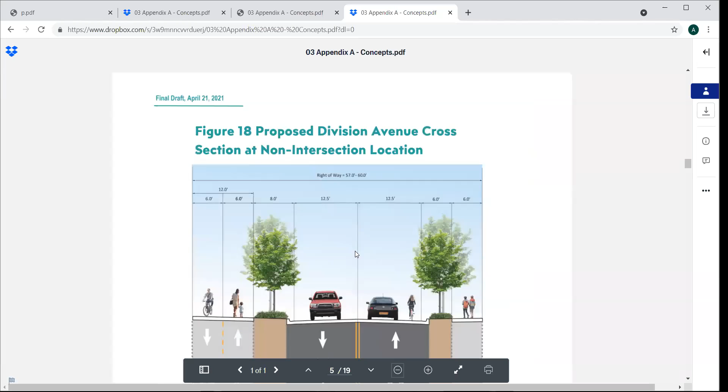Very good. All right, on to the revisions for Division. So Mandy, you said that was the current truck route map. Is there a proposed or future truck route map? Are there any major changes to that?

Quasi—it's later in Appendix A. The reason I say quasi is because we can forecast what we intend for it to be when our capital improvements are implemented. The sequence in which those are implemented and the actual conditions have to be evaluated when we revise our truck route map.

For example, if we completed our Baldy extension project—and that gets completed in, I'll be a dreamer, two years—then in two years we need to come forward and not wait twenty years to update our truck route map, because that's going to really help us make it more accurate.

Further, we've identified in the capital improvement list that we need to do a better job updating our travel models to understand where traffic is, and updating our classifications of streets on a much more regular basis, so we're responding to this growth thoughtfully versus relying on a 20-year-old document.

So the reason I say that is, later in the plan, if these things are implemented, here are the arterials, and the arterials are typically our truck routes. It's going to show a better east-west connection on Pine so we could drop Fourth and Church—that would be great. It's also going to show that we'd have the Baldy connection.

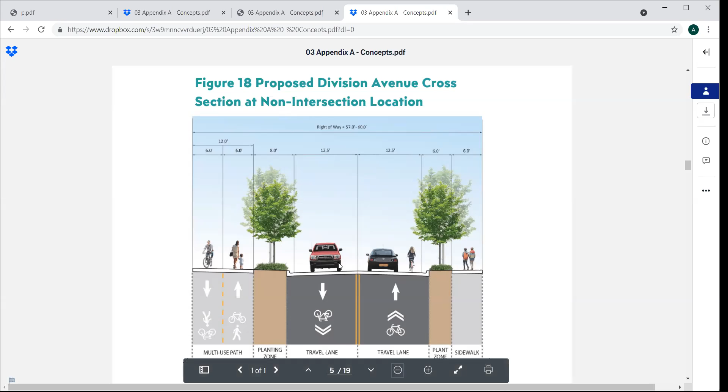With a slightly modified, same consistent path and sidewalk, but slightly smaller buffer zones at the intersections.

I'm going to breeze through Baldy because I think you're familiar with it, but essentially we've talked about in the past with the developments that have come forward, the need, regardless of the Baldy extension, for a signal here at Baldy and North Boyer. The volume of traffic at that intersection is saying this isn't very good. And I know for those of you that have experienced it, it's not only that you wait a really long time, but waiting a really long time means you start to avoid that route.

It means your Google's now sending you somewhere else, which is now putting you on a local road that's negatively impacting our pedestrians and bicycles. So it's this fine balance - we do need to have functioning intersections because the consequences of not trickle down to our other streets where we really want to focus on pedestrians and bicycles.

So then it carries forward, it extends Baldy Mountain to the east and connects into Fifth Avenue or Highway 2.

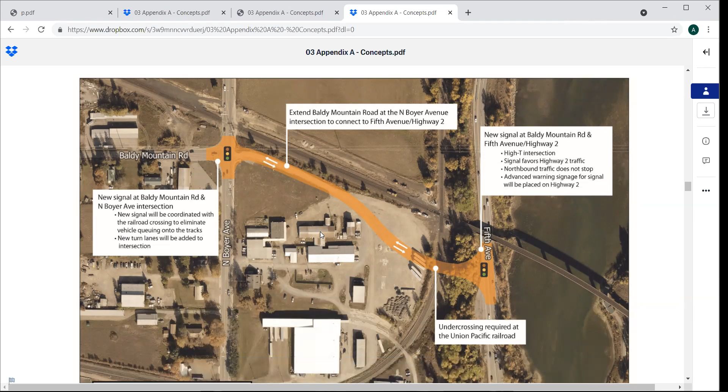This would be Highway 2 where it would connect, just south of the BNSF bridge that crosses the highway. And then it actually goes underneath, in this concept, the Union Pacific Railroad. One advantage is that the city actually owns this property, so from a right-of-way acquisition perspective, it's advantageous.

Did you say we go under the railroad? Yes. Really? Yes, it has its own bridge - they build a new bridge. Is it like a reverse bridge, like a flyover? No, it goes underground. So the current grade, if you were to stand on the ground out there on that property, it goes down, and then it'll go underneath those tracks and tie into Fifth Avenue.

So it's not going to 95, not going to the byway? Not to the byway, good point. So the byway is Highway 95. Fifth Avenue is Highway 2, also it's old 95. Isn't that Highway 2 now? Because 2 comes in from the west and turns into Fifth Avenue - it's technically Highway 95 at 200.

Could, still is. Yeah, it's not two. I thought that was two. Okay, so anyway, there's a transition point. Now this is very exciting, it goes under the railroad track. Yes, because the last I heard, that was kind of off the table, or no, it's been a while. So what you're saying - yep, good point.

So back in previous planning efforts, and here we go with our terminology, the US 200 corridor - previous concepts also provided a tunnel through what is now University Place. So Ebbett Way was extended to the east, and then a tunnel went underneath Burlington Northern, as well as a tunnel underneath Union Pacific. That was a little bit too optimistic. So this plan revised it to say just one tunnel, we're just gonna do this one extension. Does that make sense? Yeah.

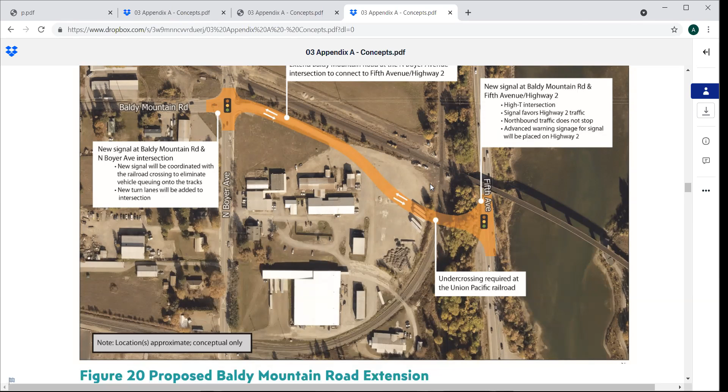We have checked with the grades. The other aspect of this is ITD is planning to lower Fifth Avenue in 2024. They already have plans for that. They're trying to get more vertical clearance underneath that Burlington Northern Bridge. So it kind of works well with our project because we're trying to go under too.

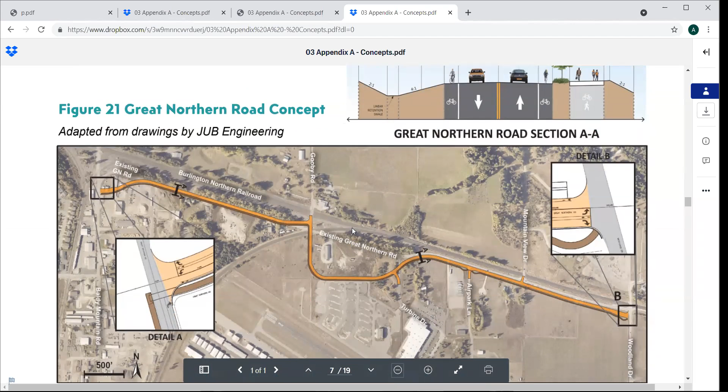So Great Northern Road, we have presented this on a couple occasions, but not here at Planning and Zoning, so I wanted to give you a quick update on that. The Great Northern Road is currently included in our Northern Urban Renewal area and district - Burlington, or I keep saying Burlington Northern, I'm sorry, that's what happens when I talk a lot. The existing Great Northern Road has been included in that plan since 2005. So we have to have a plan if we're going to have a Northern Urban Renewal District.

That plan says specifically we're going to improve Great Northern on the idea that improving it from a stormwater perspective helps spur economic development. That's really the nexus there, because currently Great Northern serves a bit as a dam, if I can call it that, and the stormwater in that area hasn't been well thought out. That is having an impact potentially on adjacent properties being able to develop those industrial lots in the manner they would like. So it's about us working with the adjacent property owners as well as this road to find relief for that stormwater.

So that was really the primary goal behind the Great Northern Project. Obviously, the road is failing as well, and it's not safe from a multi-use or pedestrian route perspective as we continue to get more residential development to the north. So the project is a full reconstruction of Great Northern - full width, stormwater, everything included.

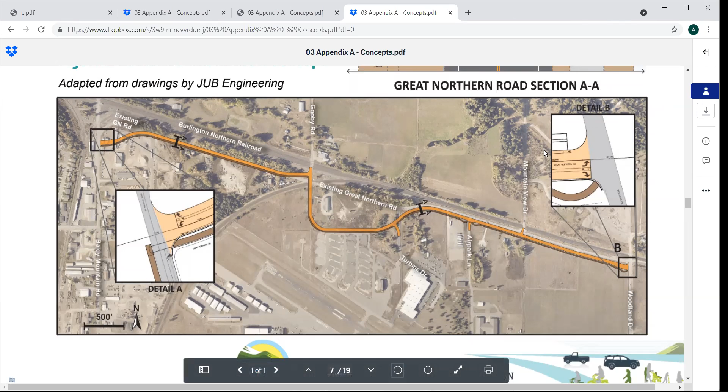This will continue to be refined in the design. But what I wanted to show you was this section, because I hope this addresses your question about making Great Northern safer.

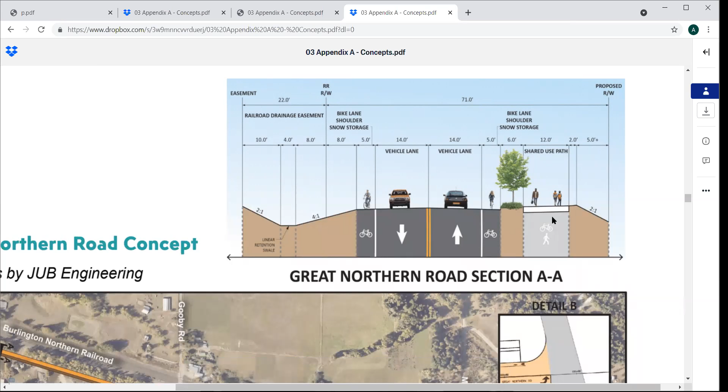Yes, we have a 12-foot path. We also have the bike lanes, and the reason for both is because we know we have commuter bicyclists that just want to be in the road, put their head down and go forward. But we still have pedestrians and little kids that want to ride their bike and feel safer, or adults on a multi-use path.

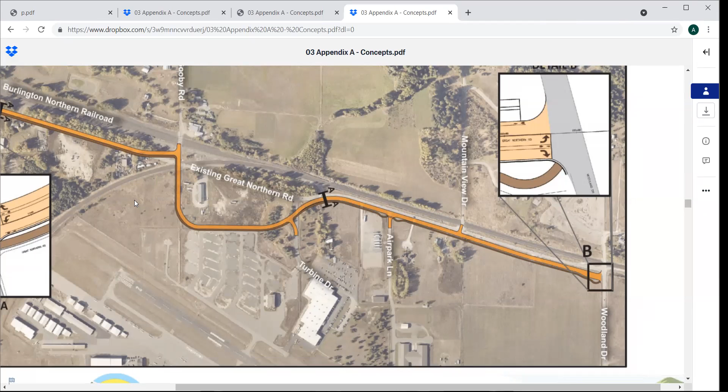What do you think is a realistic time frame for this project? Great question. So we already have a fair bit of funding allocated for Great Northern.

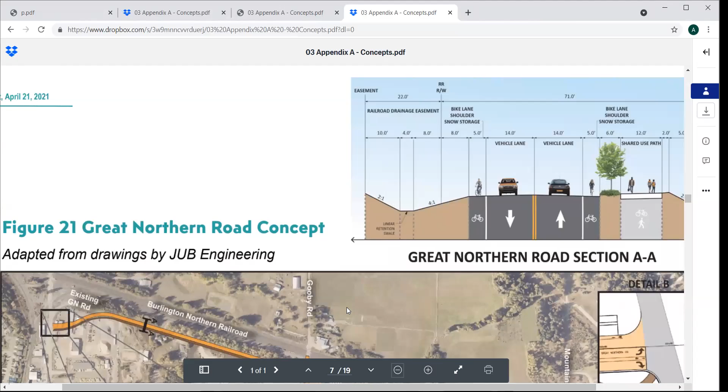In our capital improvement list, we've phased it. So in the next 0 to 5 years, we are going to complete not only the preliminary design, which we're already doing—most of these are just concepts, then the next phase is preliminary design—the engineering is already underway right now for this project, because it's already included in an adopted urban renewal plan. So with that, we need to do right-of-way acquisition, and we need to clean up right-of-way.

So that probably will take us a little bit of time. It's a complicated mess, for lack of a better way of putting it. And once we can get through that, where we don't have complicated right-of-way acquisition, we can start coming up with phased construction packages.

So that's part of the current contract with our consultant designing this solution, is to propose a phasing plan for this. I anticipate we'll spend a fair bit on our construction investment. I would say in the plan, we're saying around $8 million by 2029 is when we sunset with that. We need to spend it.

I do, and it's reflected in the plan. The overall project is a larger dollar value than that. So it will be phased, and we'll continue to look for funding opportunities to hopefully get that project completed in a timely manner.

This personally just seems like such an important project, considering how much new housing is going in North Sandpoint, just to connect that to the rest of our community. I 100% agree.

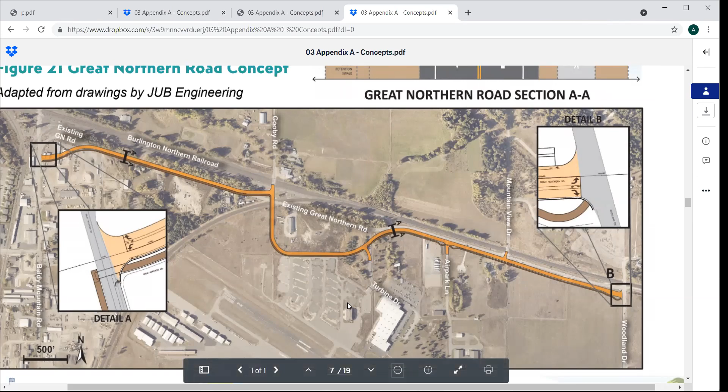So Pine Street, this is trying to show our short-term east-west connection. In a nutshell, we currently have a lot of cut-through traffic through South Sandpoint. I know all of you are familiar with that. Really, this goes back to the statement I made earlier—it's because we're not providing them an adequate alternative route. So they're getting bound up and not wanting to take this right turn onto 5th Avenue and then a left onto Church and hope you can get out on Church. And so they're finding the path of least resistance, kind of like water, and going through South Sandpoint.

So this proposal is saying we're going to close off access westbound from Superior. You'll no longer be able to go straight through South Sandpoint. We'll do that with signage in the short term, and push traffic north on 1st Avenue on Pine, recognizing that the community would very much like to see Pine Street taken back to a two-way in that single block location.

So we have worked really, really diligently with ITD and done an extensive amount of modeling to support the fact that we can make this change without negatively impacting their system, which is an important aspect. When we're talking about including changes in our plan on another jurisdiction's road, it's really important that they're on board with the solution. We could put a solution in our plan that they're not on board with, and then we'd be fighting uphill the whole time. So we've done our best to partner with them on these solutions.

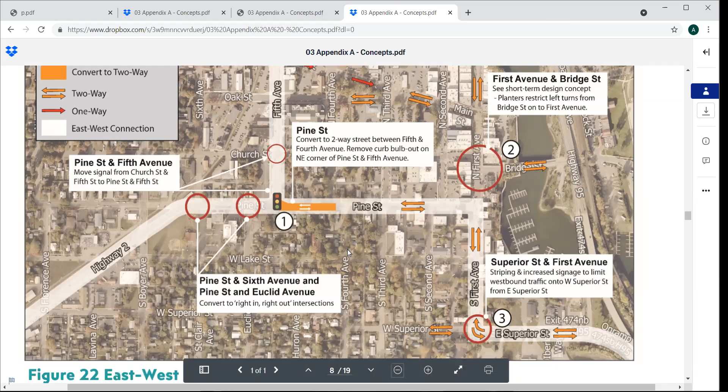It's not like they're cutting through, they're following directions, because it's the path of least resistance - our arterial systems are currently not functioning the best that they can. Well, a lot of people living in South Sandpoint do that. I used to live on Euclid. It's just a really common way to go through that part of town. But yeah, it's residential - it's just too much volume.

In fact, I'll confess our engineers asked, is this really a problem or is this a perceived problem - because that's a valid question at times, right? So we did a lot of data collection and they were blown away. They're like, yeah, this is a real problem. We stood out in the intersection with 3 people, not machines, people, and literally just counted.

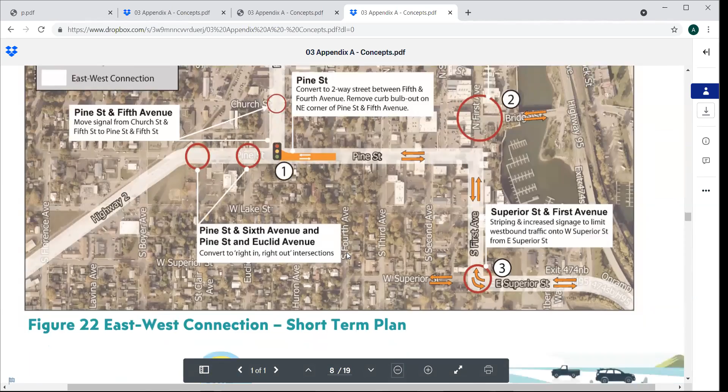And it's remarkable, I think the stoplight pole is still there at the end of it. I don't know if it meets current standards, but yes, it is still there.

Okay, so long-term this solution is showing - fast forward to the future. I don't know if the future is 10 years, 20 years, at which point all of these things may be implemented. But we anticipate, as a result of sheer volumes of traffic, that we're gonna find a need to add signals at these locations. We're gonna talk briefly about some changes at Bridge and First, and then we do anticipate needing to move forward with the couplet - not the curve, but the couplet.

Basically a couplet is sending northbound traffic on Fifth Avenue and southbound traffic in what is currently the parking lots. Those parking lots are owned by ITD right now, and that is their right of way to put the highway.

What this plan has revised, and I think arguably improved, is we're no longer putting in a road and wiping out several businesses. Really the objective with this was to make the data work for sure, make it safe absolutely, but do everything we can to avoid wiping out businesses. And so in this application, it's one business that would be taken out, and that's Melody Muffler. I have spoken with him myself, and he's incredibly excited about this project. It was the easiest conversation I've ever had with anybody, so I really commend him for his understanding.

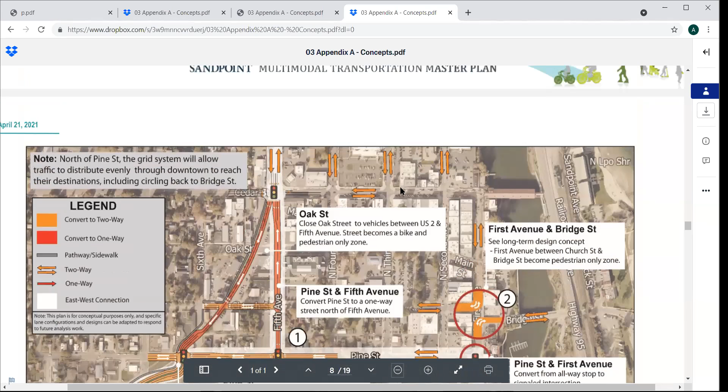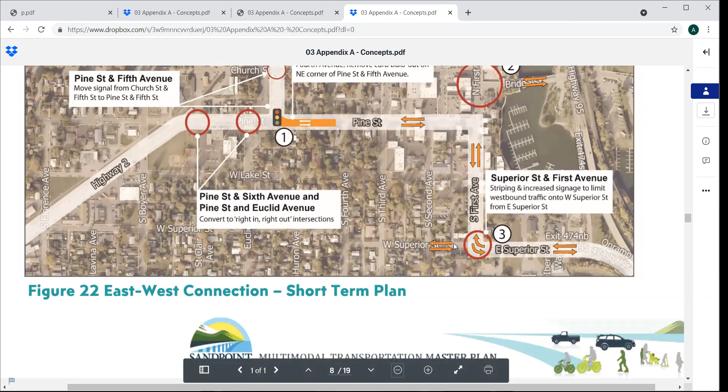Were we right the first time and we should have acted on it? Why are we coming back to this now? Great question. We're going back to it for two reasons. I don't think that we were wrong. I think we made decisions based on the data we had at the time. We've now felt those changes, and I think the fact is sometimes there are unintended consequences.

The unintended consequence of making Pine Street one-way for one block resulted in all this cut-through traffic through South Sandpoint. It's like our main line of pipe — we put a hole in it, and now the water's going everywhere else. So because of that, we're saying we've got to repair that pipe, because that's where we want the flow to go. By doing that, we're actually making our local streets safer.

So I don't think the decision was wrong, but as far as the couplet itself goes, I think we were concerned about how many businesses it was impacting, as I understand it. Number one, Dub's was threatened — that was completely wiped out. Yeah, that was on the oval, or the curve. It had a big oval-shaped roundabout in it.

Even the concept of just moving the signal, because of the turn lanes required for the size of that intersection, would wipe out Dub's. So even without a roundabout at that location, keeping the signal there in the long run would take out Dub's. So what we're doing in this application — and that goes back to me saying we think we can do better — is moving that whole signal further onto city-owned property, the park next to the garden, Dub's Field. In the past, ITD has avoided impacting a park like the plague, rightfully so, because most communities don't want that and federal funding doesn't want that.

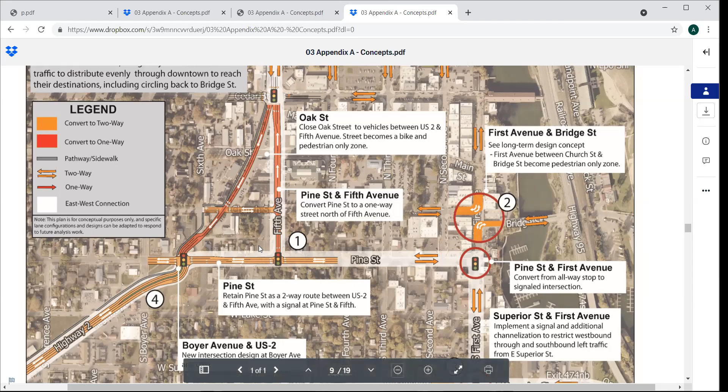Okay, so Bridge and First — this is the short-term concept. Back to level of service, although it's only one metric, I do want to note, because it's a data point that helps give a visual: during our peak season, on a Saturday, we actually counted data. We did pedestrian, bicycle, and vehicle counts for every turn movement, and this intersection functions at an F today without additional growth on a peak season Saturday. It's terrible — terrible for all users.

So this short-term solution is really taking two factors into consideration. We know we have a final phase of our downtown improvements, so how can we improve this final phase, this intersection, with a long-term vision for the future, so that we're not reconstructing what we just built? We don't want to build something in the short term and then in the long term realize we've got to do something with this intersection — now we've got to rebuild First Avenue and Bridge. So we're saying when we go to do the improvements on First Avenue and Bridge Street, this is where we'd like the sidewalks to be, this is the cycle track — we're improving bicycle connectivity with a cycle track itself.

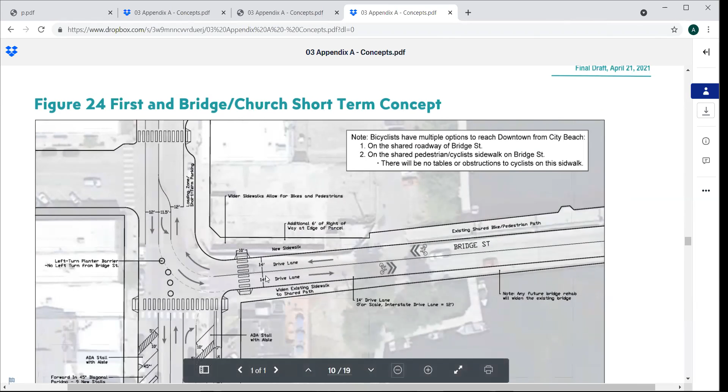So with that, it's a short-term plan. It provides some temporary planters, when we're in peak season, not during snow, to prevent those left turn movements that you're not allowed to do southbound currently. So that's kind of the short-term plan.

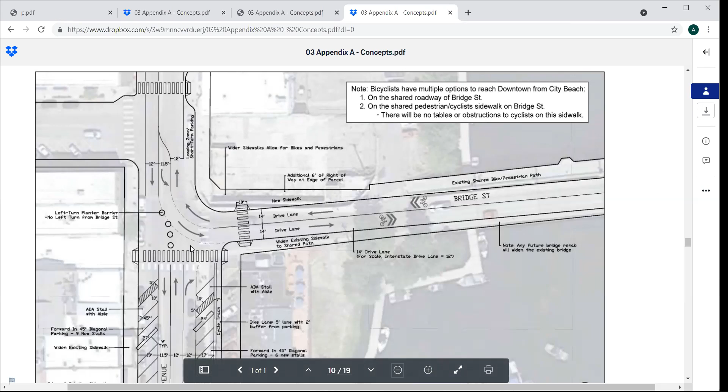But we know we're already at an F, and the sense is that at some point the frustration with this intersection is going to have a tipping point. If and when it does, I don't know when that's going to be—that's really for our community and council to decide, not just the data. It could be a year, two years, 20 years. I don't know, but we're going to get to a point where we're going to say enough's enough at this intersection, we've got to do something.

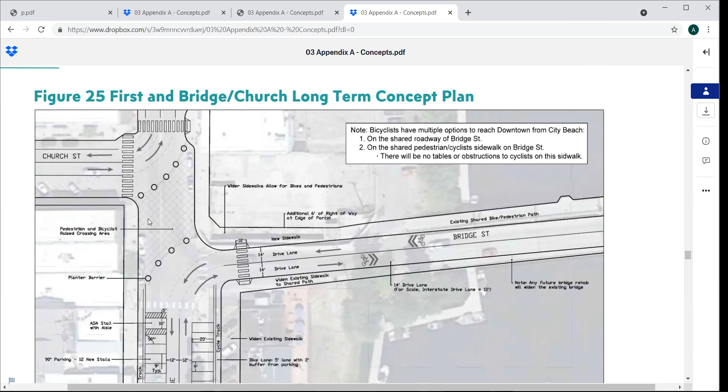And this plan is proposing that something—albeit there's no perfect solution at this location—would be to actually block off movement at this location. So between Church and Bridge it becomes more of a plaza, and we provide free flow this direction. This portion of First Avenue becomes more like a parking lot, with 90-degree parking stalls so you can come in and out.

And this solution, from a pedestrian perspective, a bicyclist perspective, and a motorist perspective—we looked at all metrics and it goes to an A for all users. So from an F to an A.

I've been talking for a really long time, so I apologize, thank you.

So it has a significant improvement on it. It is a big change, and big change takes a little bit of time to maybe warm up to. So I don't think we're ready for this now, but if we get to the point in the future where the community says we've got to do something here, maybe this is what we'll consider.

I don't know, I think they would like it because it's the most contested area. When the whole traffic revision happened, that area—we went back and forth many times on what was the stop sign and no turn. Wouldn't that also remove the need for a light at Pine and First? It doesn't.

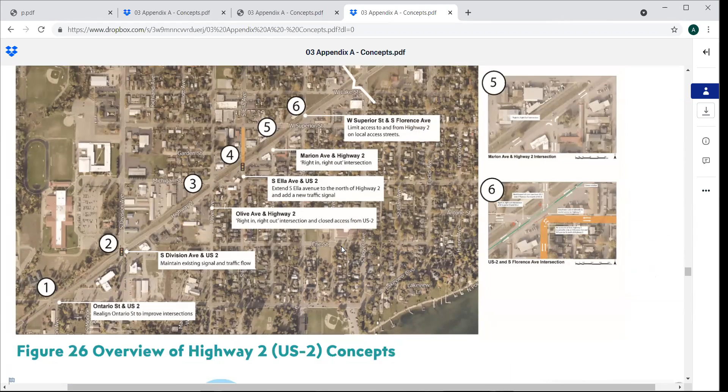That could be an unintended consequence. There's a lot of U-turn traffic at City Beach with people saying 'how did I get it here' - it would take some significant signage. That is 100% right.

Well, in high school we used to cruise the beach all the time. That still doesn't happen. You're dating yourself now. But it's true, if you're coming into town, I got busted by her cruising the beach.

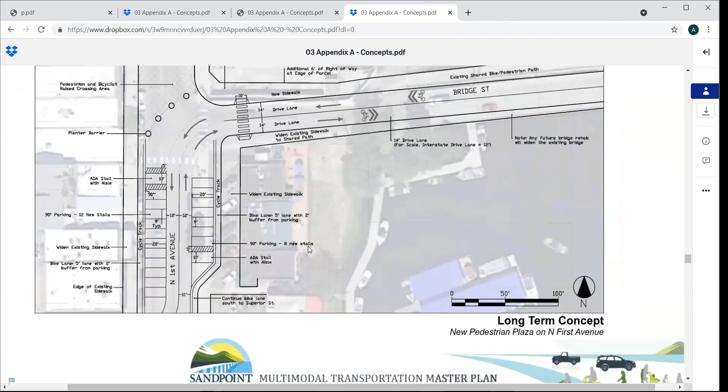And if people take a left on Pine and they wanted to go to the beach, they're gonna be bummed, and they're gonna try to go around the corner, and they're doomed, they'll never get to the beach. Well, they just have to turn right on Second and go to church. But they'll need overnight accommodations there. Get a milkshake and try again.

That is a point, if you're on the north side of town and want to go to the beach, it's a much different route. I think a lot of us look at this as coming into town from the south. But from other directions it kind of makes sense, because I feel like it does a better job of putting people on Pine Street. And that's what we want, we don't want people driving through town that are just trying to get through town. Exactly, and if you just want to come to the beach and go back south, then just stay here. Well, a whole lot of those cars in the summer are gonna have big boats attached to them.

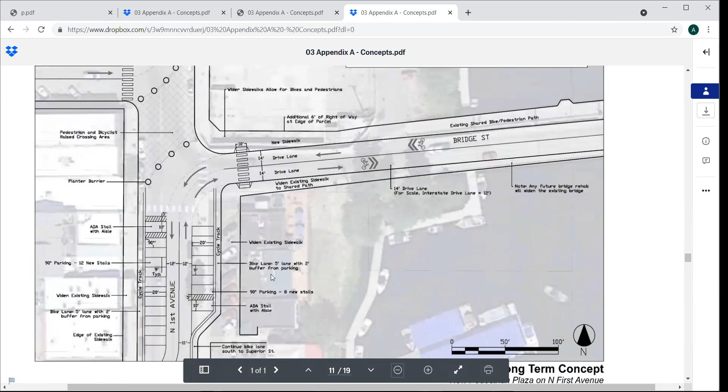You're absolutely right. So anyhow, the intent is to improve safety for all modes with this, including how to get a bicyclist safely to City Beach. This was not the perfect solution, but it's proven to be the best, I think. So we'll see in time. But the temporary one with just planting...

That's not cutting off the two-way traffic. It's just allowing for what happens today, with a little bit of a barrier, so don't just ignore the sign, more of a significant barrier to taking a left-hand turn.

Yes, but because so much of the volume is trying to go south, we're actually sending people north to send them south. So they're forced to go through our town to get back south with their boats and RVs, or they're using Church and getting to the poorly functioning signal there.

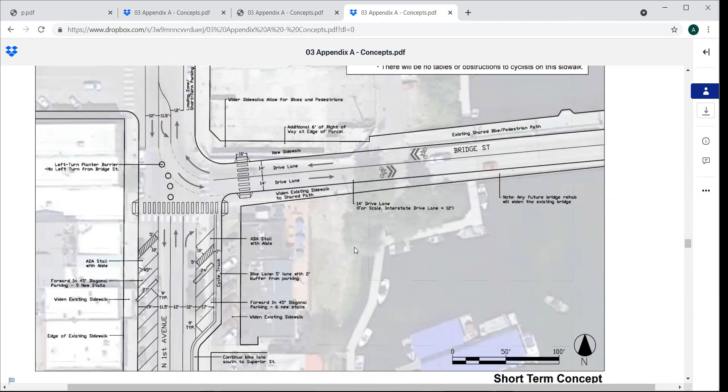So that's the thing with transportation, right? One little action over here really affects the whole system.

I'm not going to get into the weeds of this one for the sake of time, but please spend a little bit of time taking a look at these concepts in detail.

We are proposing to close off access to some of the skewed intersections along Highway 2. This is definitely Highway 2, it is not 95 or 200.

I'll point out the most significant change, and that would be in the future adding — as a result of closing off these access points, we've got to provide another avenue that is efficient, sticking with my pipe analogy.

So we're proposing to add a signal here, and I can zoom in on the other section, here at Ella. So Ella currently doesn't go through, but we would really like for it to. Further in the plan, you can see that zoomed in.

What road comes in from south Sandpoint at Ella? Is that Michigan? Yes, Michigan. And the next map, I'm gonna answer that question with this one.

So slightly different format than the pages we were just talking about with the level of service, but this is trying to show, with all the improvements, a different way of looking at it — what are our arterials going to be, what are our collectors going to be, if all these improvements happen. We did a good job in our other images of showing what happens with Pine and some of these key arterials, but not what the consequence of doing that is.

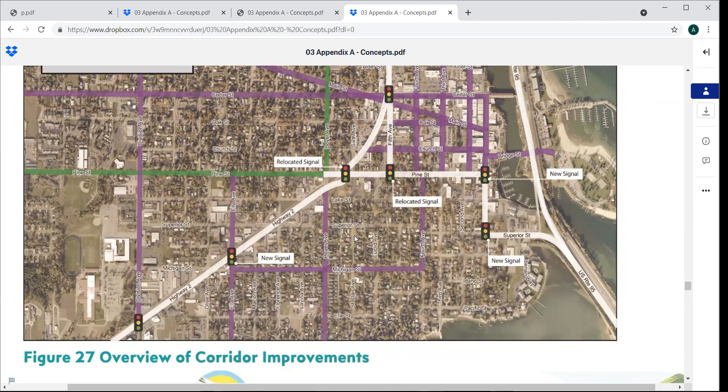It will be interesting to see how the improvements happen in sequence over time. We'll do our best to prioritize them in a way that gets this result. It's just going to be a timing thing, of what street becomes a collector versus an arterial — back to that conversation.

So this is just a zoomed in version of what was just shown. I'm not going to go into detail on these, but I will tell you about this plan — it was pulled directly from the US 2 corridor plan that was put together a few years ago. It was a solid concept, and so that was carried forward.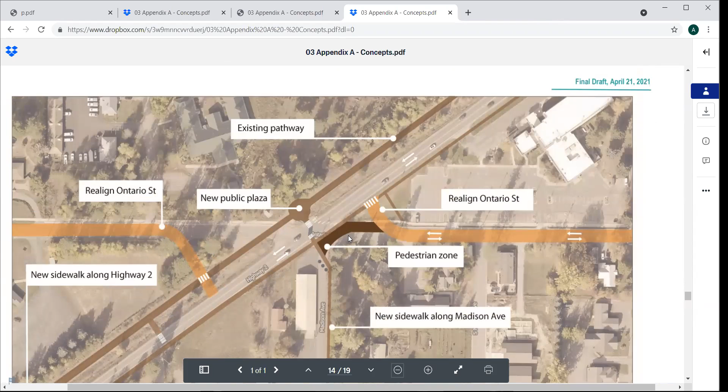And we show the existing light here to remain at Division. We show some realignment — this is at Michigan and Olive, where we're actually closing it off completely to Highway 2. Can't get out, can't get in.

The idea behind this is that every access point on Highway 2, and the number of them, is causing conflicts. Those conflicts are where we have our highest incident rates, both for pedestrians, bicycles, and motorists. The more access you have onto a major arterial like this, the more your risk goes up, which is kind of common sense. We also have the skewed angles of those intersections that everyone has experienced firsthand how crazy that can be.

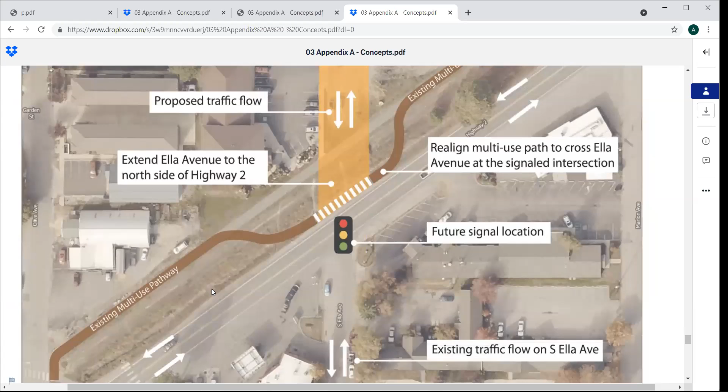So on this, where Ontario crosses Highway 2, for cars it will be offset by quite a bit. If you're on a bicycle, do you go to that new public plaza and cross there? Yes, okay.

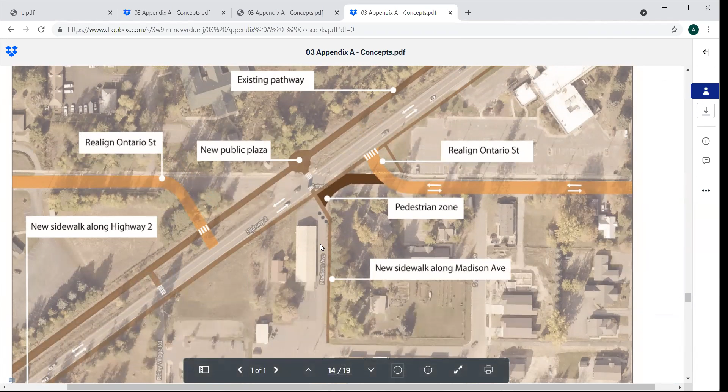Restaurants, okay. Highway 2 is known for not having any place to cross safely besides there and a stoplight, and then all the way down at the next stoplight. So there's a long stretch with no safe way to get across. Yep, so that's the intent of Ella.

If you look at the map holistically, the whole corridor from Division all the way up to Larch, the intent with signals is they should be equally spaced. That's really the end result, and why Ella was chosen over another intersection, to make sure there's relatively equal spacing. Because if it's too far away, you won't go that way, you'll find an alternative route.

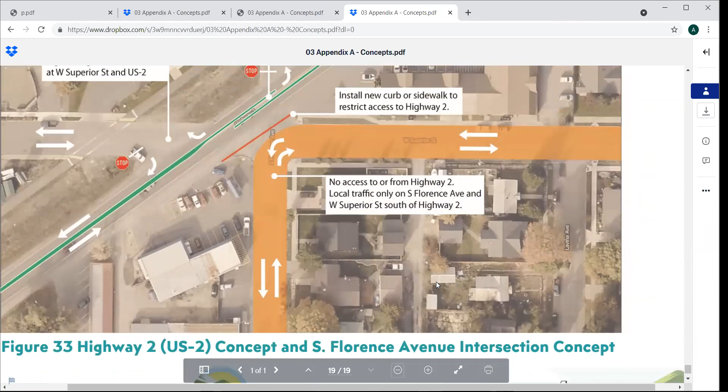And then last but not least, Florence, look at all those arrows. Similar to what we were just showing at Michigan, we're saying no in and no out here at Superior and Florence. So this would function in reverse of what we just showed. But that's where GPS sends you.

I just have to take a right, and just-

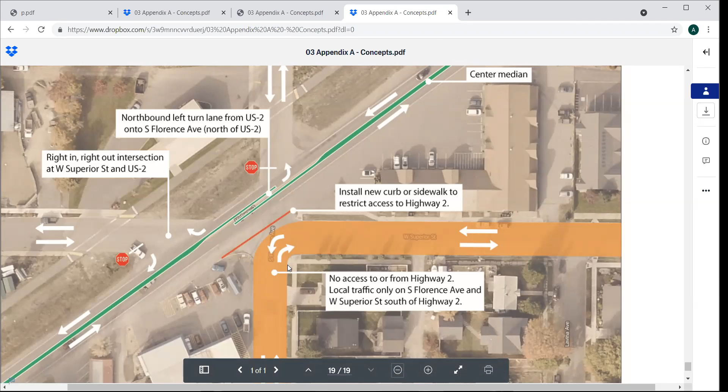You know what this reminds me of is Boston. Oh boy. You take a right, that's good, you want to go around the block, and you end up in Rhode Island, and that's not where you planned to go. Well, hopefully here you just end up at Winter Ridge or Dutch.

This is an overlay on a design that worked 100 years ago. Wow, it's going to be a challenge for folks hauling trailers. Change will be very difficult.

No, it will not happen all at once, it will happen in phases based upon funding. This plan, just like our water master plan, our sewer master plans, and our parks and rec plan, they're all culminating into a comprehensive citywide capital improvement plan, typically a 5-year look ahead of, okay, in the next 5 years, here's our priorities, and where can we have overlap in those projects. If we're doing a transportation project, we should probably do the water project that goes there too.

So we've never done that before. We've never looked at all of these in such a holistic manner and come up with the prioritization that's needed. This plan doesn't prioritize them, that's the next step. This is just saying, these are all the pieces. Now we've got to figure out the puzzle.

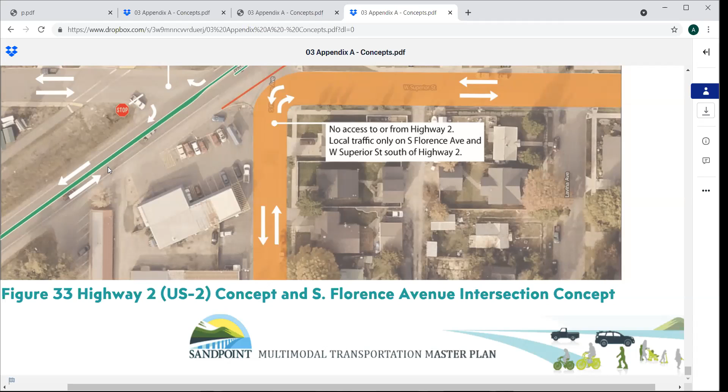Getting back to the beginning of the meeting and your concern about the bicycle options just as you're exiting to the north, is there any reason we would want to take an action on that and make a recommendation to city council if they are adopting this tomorrow? Or is that not appropriate? Well, I appreciate that, but it's not really my place to say. I apologize if I'm speaking out of turn, but this was not presented as an action item on the agenda, so I think that might be one element of challenge.

Yeah, it's not an action item. Council would be free to watch the video of the meeting tonight though, if they wanted to know what your questions and commentary are. And quite frankly, we would encourage them to do that. And if we felt that way, we should attend tomorrow's meeting. You bet, that'd be great.

You bet, as citizens. It's right here, right? Yes, right here, right there. You get to sit over there. Oh right, and you won't have a name. As commissioners, can we take one of these chairs over there and sit? That's not my decision. This chair has my name on it.

So I went to one of the public workshops. I can't remember when it was, but it was at City Hall. I was surprised how much public input there was, a pretty big variety and a lot of really good ideas, and I feel like a lot of those things brought up are in here. I'm kind of blown away, really. I didn't think, after being at that meeting, I thought there's just way too much, like people want a lot. But no, I'm surprised. I think it's really well put together. I really appreciate that comment.